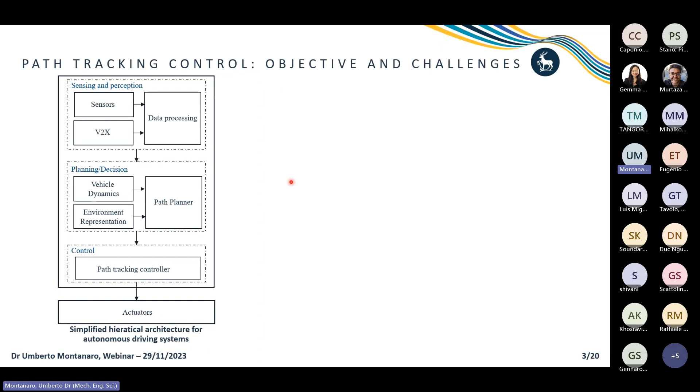If we consider an autonomous vehicle equipped with a hierarchical control architecture, we can clearly identify three key layers: the perception layer that provides the vehicle information of the surrounding environment, the planning layer that is used for generating collision-free trajectories that the vehicle has to follow, and finally the control layer that decides the commands to the actuators in order to perform a given driving task.

In this layer, we find path tracking controllers, which generate commands to follow the path decided by the planning layer, for instance, with a given speed profile.

The design of path tracking control strategies is a challenging task, as the resulting control system must be robust to several factors, such as vehicle nonlinearities and parameter uncertainties, for instance, in terms of cornering stiffness of the tire. Moreover, there is the need of robustness to the coupling of the lateral dynamics of the vehicle with respect to the longitudinal ones.

On top of that, the experimental testing of a path tracking solution can be challenging and time-consuming. In these regards, car-like robots, such as the QCar, can be used to shorten the time of testing and validation of novel control solutions.

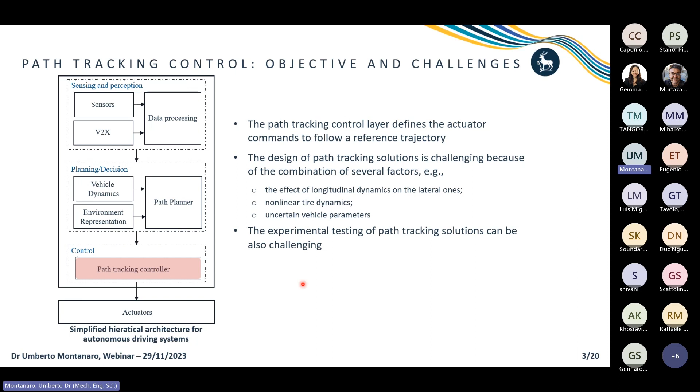In this general framework, the objectives of this webinar are threefold. First, we want to present the design of two path tracking control strategies that have been developed within the S-Cosmos team.

Then the target is to discuss the implementation and the experimental validation of these strategies through the QCars that have been used as a platform for rapid control prototyping.

And the last target is to compare the performance of the proposed solution with a set of algorithms taken from the open literature. Also, these algorithms have been implemented in our lab and used as benchmark control strategies. In terms of hardware, we have three QCars and a Quanser reconfigurable track.

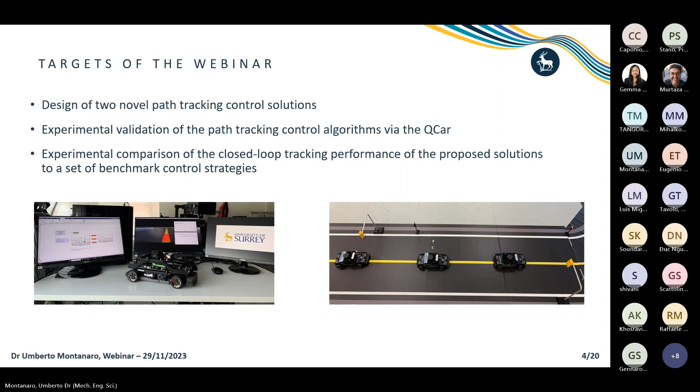This slide briefly presents the points that we are going to discuss in this webinar. As said before, the core part of the webinar is dedicated to the experimental validation of two novel path tracking control solutions that have been designed with two distinct methodologies.

In particular, we will focus first our attention on a neural network-based enhanced model reference adaptive control, here abbreviated as NN-EMRAC. And then we will focus on the design and experimental testing of a deep reinforcement learning algorithm based on an expert demonstrator. For each of these algorithms, we will present first, briefly, their working principle with some design details.

Then we will point out the key features or the unique aspects of each control methodology that we want to test experimentally. And then we will discuss the experimental results through a set of key performance indicators, also abbreviated as KPIs.

However, as the proposed control solutions require, in some way, the use of a dynamic model of the vehicle, before deep diving into each control algorithm, I want to briefly give you some details about the mathematical model of the QCar that we have developed, along with its experimental validation. Moreover, we will touch briefly on the control architecture developed to host these control solutions.

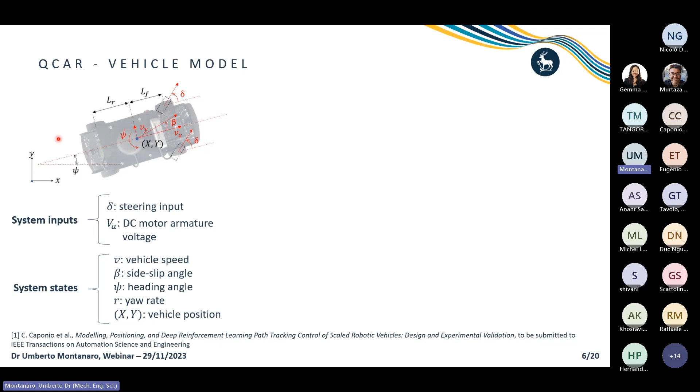The longitudinal dynamics have been modeled through a first-order linear system, while the lateral dynamics are captured by a third-order linear system. For these two models, the lumped parameters P1, P2, and P3, along with the cornering stiffness of the front axle and the rear axle, indicated as CF and CR, have been estimated experimentally using a two-stage identification procedure, as these parameters are those most affected by uncertainty.

The identification procedure and the full experimental validation of the model that we have developed are reported in this paper, titled Modeling, Positioning, and Deep Reinforcement Learning Path Tracking Control of Scaled Robotic Vehicles: Design and Experimental Validation, recently finalized by our group.

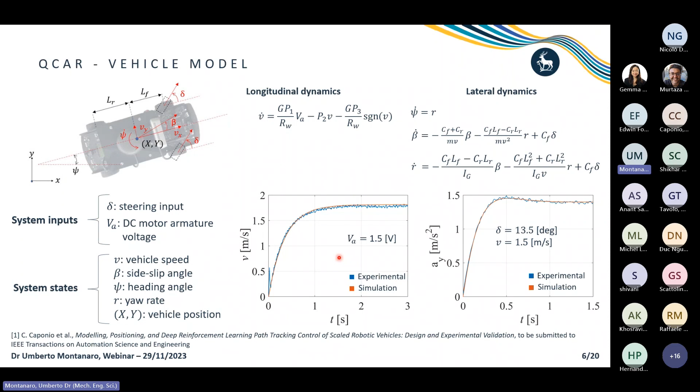Here we just report two model validation results. The first is related to the longitudinal dynamics and shows the evolution of the speed of the vehicle when the armature voltage is a step of 1.5 volt. The second plot is dedicated to validation of the lateral dynamics and considers a step steer of 13.5 degrees when the speed of the vehicle is 1.5 meters per second. For both plots, we note that the state evolution predicted by our models, shown as a red solid line, matches the experimental data represented by a blue solid line.

In terms of control architecture, we can mainly identify three subblocks. The first subblock is a federated Kalman filter composed of two extended Kalman filters and a master filter. This subsystem is used to generate a more precise estimate of the vehicle states based on all the measurements provided by the LiDAR, encoder, and IMU sensors equipping the QCar.

The second subblock, denoted as the tracking error generator, is used to compute the reference trajectory, including the reference heading angle psi ref and the reference curvature kappa ref, as well as the tracking error, including the error on the heading angle denoted as delta psi, and the lateral displacement between the center of mass of the QCar with respect to the trajectory to follow. These errors, computed with this formula, are then sent to the last layer of our architecture, the control layer.

In this layer, we find two controllers: a cruise control for imposing a desired speed, and a path tracking controller, which can be either the neural network enhanced model reference adaptive control strategy or the deep reinforcement learning one.

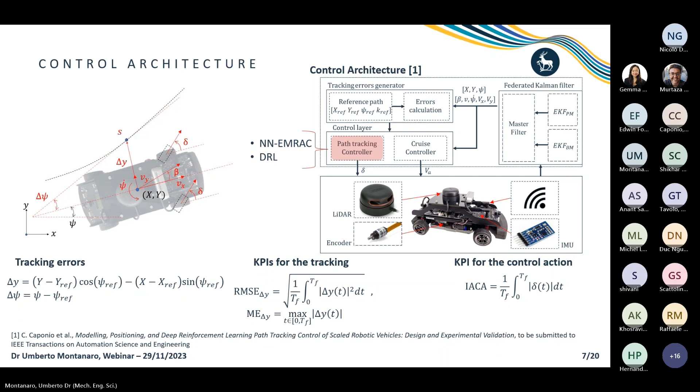So let's start analyzing the design and working principle of our first control solution, the NN EMRAC, the Enhanced Model Reference Adaptive Control equipped with neural network. But first, I would like to show you the neural network enhanced model reference adaptive control structure step by step.

So if we think of classical control strategies in the state space domain, usually these control strategies are composed of two control terms: a feedback control term and a feed-forward control term, where the feedback gains Kx and Kr are usually constant and selected offline by practitioners.

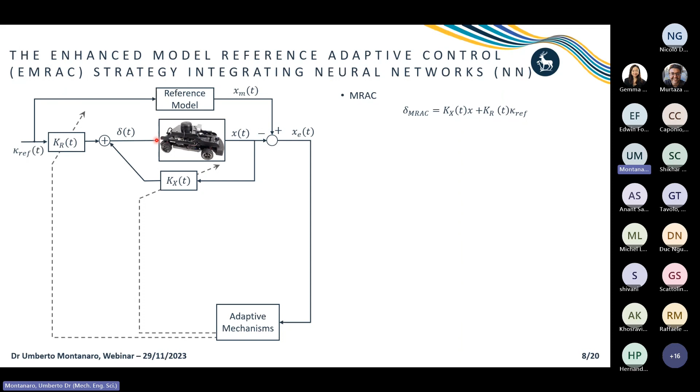In the case of the standard model reference adaptive control algorithms, these feedback gain and feed-forward gain are adjusted, or better adapted, online through an adaptive mechanism such that the dynamics of a reference model are imposed on the plant, in this case the QCar, despite parameter uncertainties, external disturbances, and eventually nonlinear terms not considered during the modeling of the plant.

The enhanced model reference adaptive control strategy extends or augments the classical model reference adaptive control solution by adding two additional control terms: an adaptive integral action and an adaptive switching or sliding mode control action. The gain for the integral action Ki and the gain of the switching action Kn are again made adaptive through an adaptive control law.

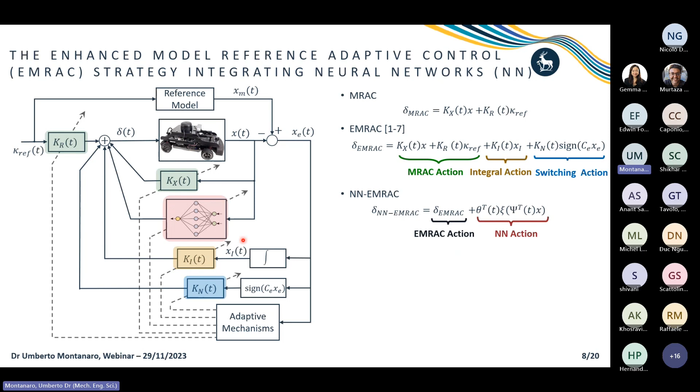Finally, the neural network Enhanced Model Reference Adaptive Control further extends the control action by equipping the classical Enhanced Model Reference Adaptive Control strategy with the control action provided by a neural network, to further improve the tracking of the reference model.

As an additional note, I want to point out that the initial version of the Enhanced Model Reference Adaptive Control solution was proposed around 2010 during my first PhD. However, over the years, I had the chance to extend the theory of the Enhanced Model Reference Adaptive Control in different directions, and I also had the possibility to apply this theory to several engineering control problems, including the control of the electronic throttle body, common rail systems, and robotic manipulators. A version of the algorithm was also used for path tracking, but not experimentally validated.

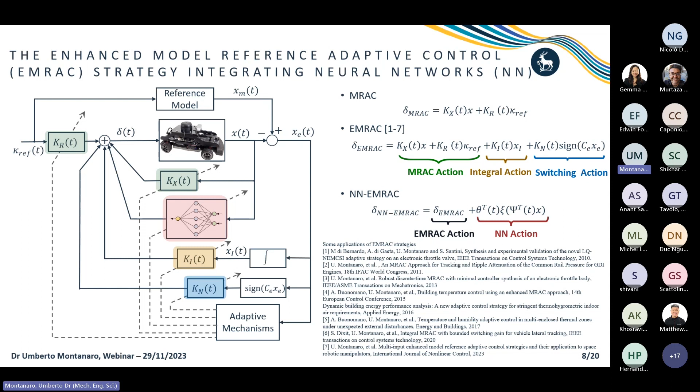In this webinar, we experimentally test via the QCar different Enhanced Model Reference Adaptive Control formulations, including also neural network.

In terms of details on the control design, the reference model has been selected as the nominal model of the QCar presented previously in this webinar, controlled through an optimal linear quadratic control action, abbreviated as LQ. The states used for control are the lateral speed, the yaw rate, the lateral error, and the heading error. For the neural network activation function, we have selected the ReLU.

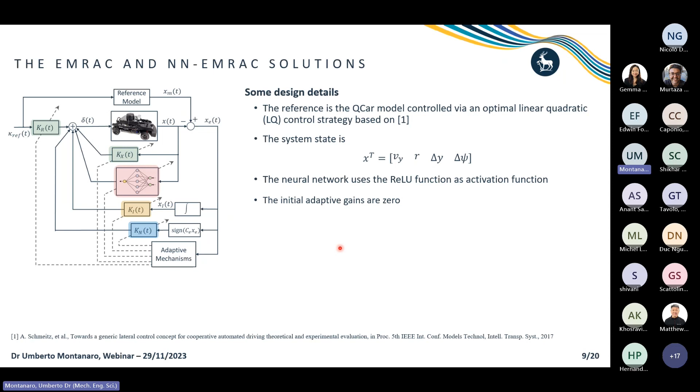Finally, it is important to point out that all the initial adaptive gains and the weights of the neural network are set to zero. Thus, in our design, we assume that we don't have any pre-knowledge of the plant that could have been used for initializing these gains. And somehow here we are considering one of the worst case scenarios, where the gains are all initialized at zero.

The target of the experimental campaign is threefold. We want to first study the closed-loop dynamics with and without the neural network, and this also enables the second target: the evaluation of the effect of the neural network control action on the closed-loop tracking performance. Another target for the experimental analysis is the study of the dynamics of the adaptive gains.

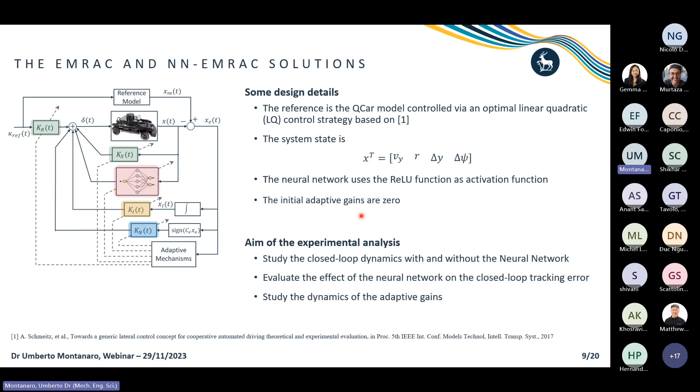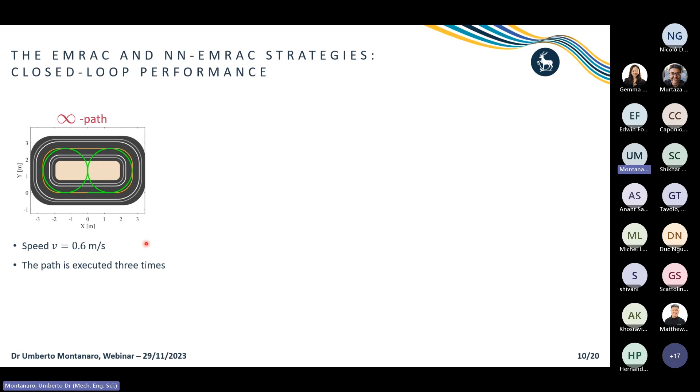In terms of path, we have selected this infinity shape path to be performed with a constant speed of 0.6 meters per second, and this path is executed 3 times.

Here we have some experimental data where the dashed black line is the reference model dynamics. Then we have the closed loop dynamics given by the Enhanced Model Reference Adaptive Control in green, while in orange we have the output provided when the neural network Enhanced Model Reference Adaptive Control is used.

From these initial experimental data, we can already derive some interesting observations. First of all, we can note that the contribution of the neural network can improve the tracking of the reference model in steady state. For instance, if we look at the steady state heading angle, we can see there is an improvement compared to the reference model. But mainly, we can note that the neural network improves the tracking performance during the initial transient of the adaptive gains.

This is clear if, for instance, we look at the initial transient of the lateral error and the initial transient of the heading error.

In terms of adaptive gains, here we have reported the evolution of phi and phi N for both the adaptive algorithm with and without the neural network, where phi is the integral part of the stack vector composed by the gains kx, ki, and kr, that are the gains of the continuous part of our adaptive strategy. Instead, phi N is the adaptive gain of the adaptive switching control action.

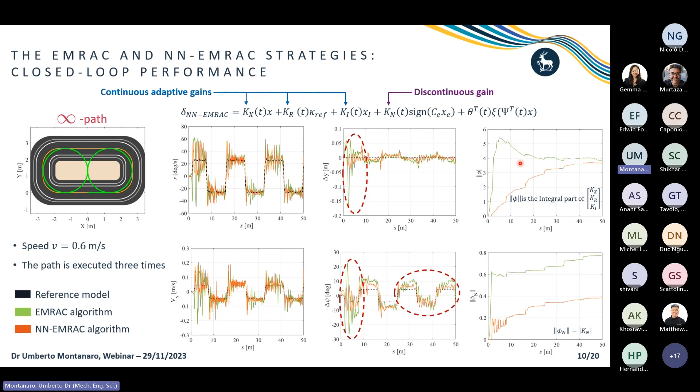The qualitative analysis that we have just presented is further confirmed by the study of the key performance indicators, which have been computed over the first cycle for 3 different speeds: 0.6, 0.7, and 0.8 meter per second.

The analysis of the KPIs shows that for 0.6 and 0.7 meter per second, the control effort required by the neural network enhanced model reference adaptive control is smaller than that required when the contribution of the neural network is switched off, and this improvement is about 30%.

This reduction in the control effort is mainly because there are smaller errors during the initial transient. If we look at the key performance indicator for tracking performance, we see that it improves with the use of the neural network, especially for 0.6 and 0.7 meter per second. For 0.6 meter per second, there is a reduction of the maximum error during the initial transient of about 75%, while the reduction of the root mean square error is about 71% when the neural network contribution is switched on.

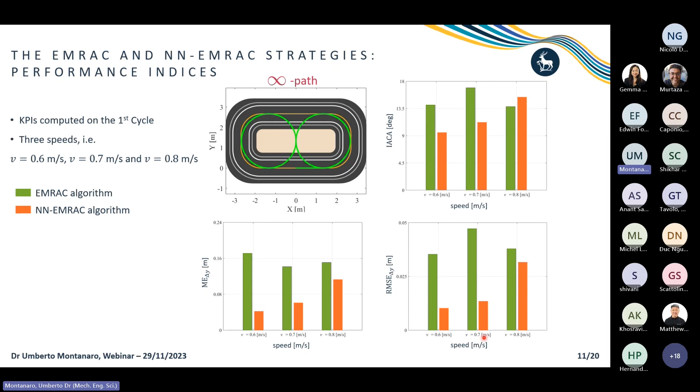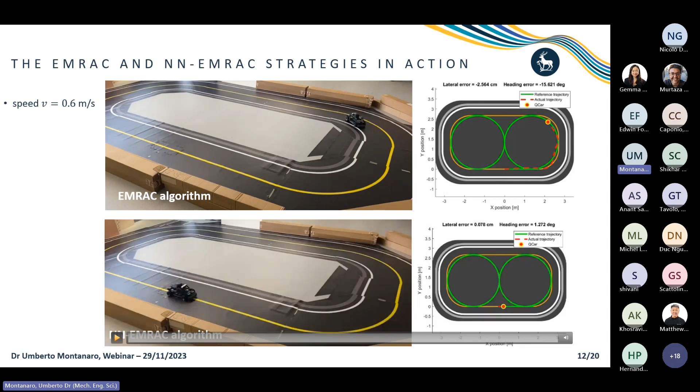Instead, when the QCar is controlled through the neural network enhanced model reference adaptive control, we can see that the initial errors between the reference trajectory and the actual trajectory reduce quite significantly. The improved initial transient response is due to the neural network control, which over the initial transient provides a further adjusting control term to the overall control action.

After the first transient, the adaptive gains and the weights of the neural network continue to update to provide closed-loop robustness to unmodeled dynamics, disturbances, and vehicle parameter mismatches.

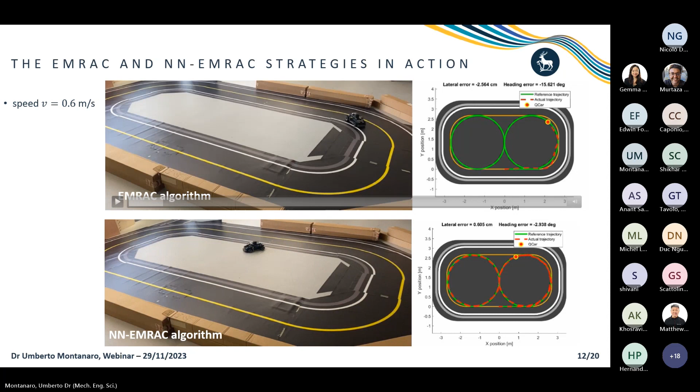Now we can focus on the second control solution for this webinar, which is a deep reinforcement learning strategy equipped with an expert demonstrator. Again, to be all on the same page, let's briefly revise the working principle of a deep reinforcement learning based control algorithm by considering directly the learning architecture that has been developed for the QCar.

For the proposed solution, the controller or agent, as it is called in the framework of deep reinforcement learning based control methods, is a neural network which decides the action or control action based on a set of measurable quantities known in the literature as observations. The agent decides the action based on observations in order to complete a given task.

In the case of path tracking, the task to complete is execution of the path with the smallest tracking error. In terms of action, we have selected the rate of variation of the steering angle, or in other words, the derivative of the steering angle, while the adopted observations are the lateral error and its derivative, and the heading error and its derivative.

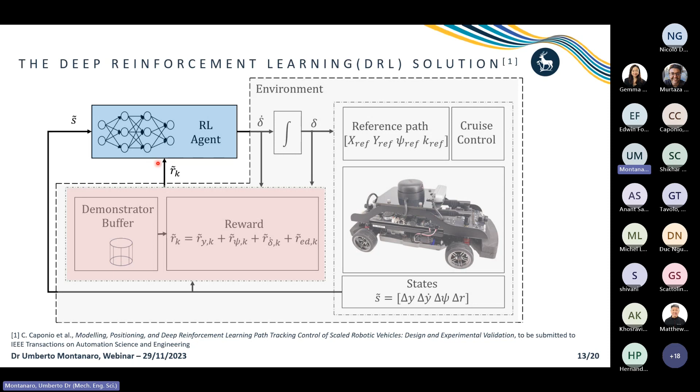In this framework, the neural network is trained to maximize the cumulative reward of a sequence of episodes. From the description of the working principle of a deep reinforcement learning control approach, it emerges that the selection of the reward function is critical for the execution of the task.

In our work, we have used an approach based on the use of an expert demonstrator to formulate the reward function. Specifically, our reward function is composed of four terms.

The first term, here indicated as Ry, considers the lateral errors and mathematically is expressed through this piecewise function that takes this shape. So if the lateral error exceeds a threshold of 0.5 meters, then there is a very negative reward. While if the lateral error is between two thresholds, then the reward is positive and increases as the error is decreasing.

Finally, the reward given by this first component is positive and constant if the error becomes smaller than a second threshold. The reason for saturating the reward when the error is small is to reduce the convergence time of the cumulative reward by avoiding the exploration of actions that lead to very small lateral errors in simulation, but that cannot be obtained in practice because of sensor limitations.

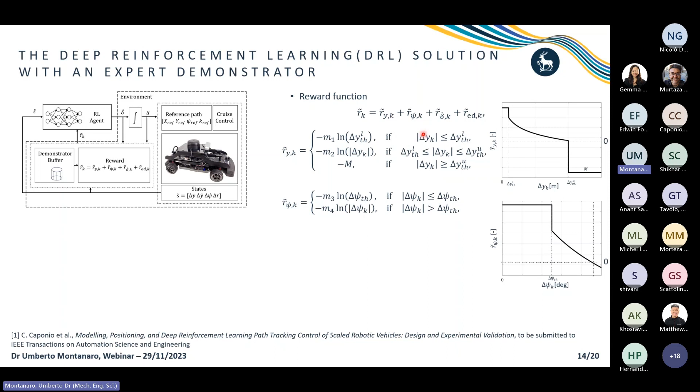The second component of our reward function is somehow similar to the first one, but here we consider the heading error. Instead, the third component of the reward function is a penalty based on the control action, which, as I said before, is the derivative of the steering angle.

This penalty is used to help the training find control strategies or policies that promote smooth variation of the steering angle. In other words, this penalty helps to avoid chattering phenomena or high-frequency components on the steering angle.

The fourth component is a term based on an expert demonstrator. In our framework, the expert demonstrator is the control action provided by an optimal linear quadratic regulator, LQ, that has been tuned using the nominal model of the QCar and can obtain in simulation a very precise tracking of the path used for training.

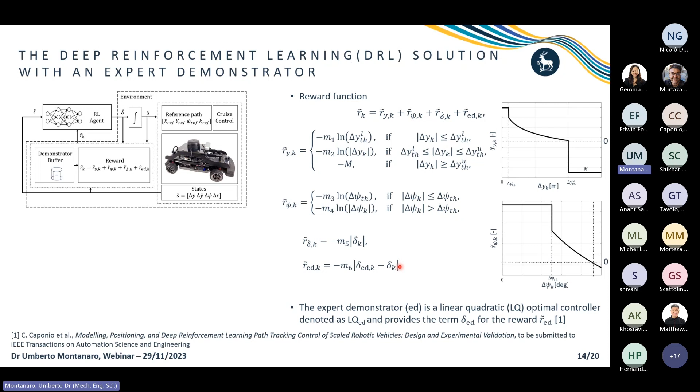The fourth component of our reward function is a penalty based on the mismatch between the steering angle requested by the agent and the steering angle requested by the expert demonstrator.

In terms of some details, for emulating the environment and for the control design of the expert demonstrator action, we have used the experimentally validated QCar model. Furthermore, the path that we have used during training is this S-shape path, and here you can see the cumulative reward over the episode. This picture also shows that the training is quite fast and converges in about 300 episodes.

In terms of experimental campaign, the target is again threefold. First, we want to test that the agent trained in simulation can actually impose a trajectory not considered during the training phase. This is an important point, as there is always a mismatch between the simulation environment and the experimental environment that can generate what is known in the literature as a simulation to reality gap.

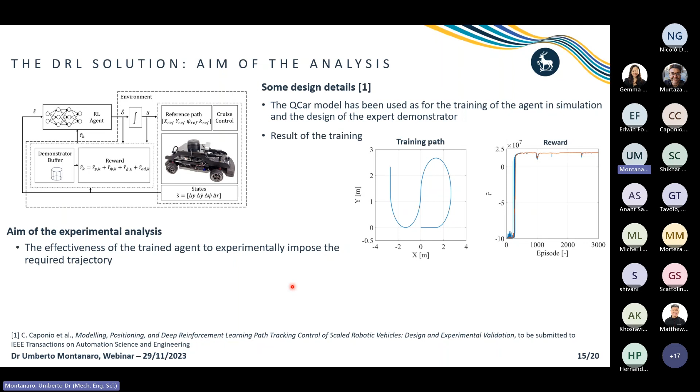This gap can prevent the trained agent from performing well in reality. Then we want to test the importance of the expert demonstrator to generate an agent that can experimentally impose the desired path. In other words, we want to test the robustness of the trained agent to paths different from those considered during the training phase.

Finally, we want to study the closed-loop performance and compare the closed-loop performance obtained with the deep reinforcement learning strategy with respect to a set of standard control approaches. In particular, we want to compare the performance of the deep reinforcement learning algorithm with respect to those experimentally provided by the expert demonstrator. We want to show that the learning process can improve the performance of the control strategy used for supporting the training.

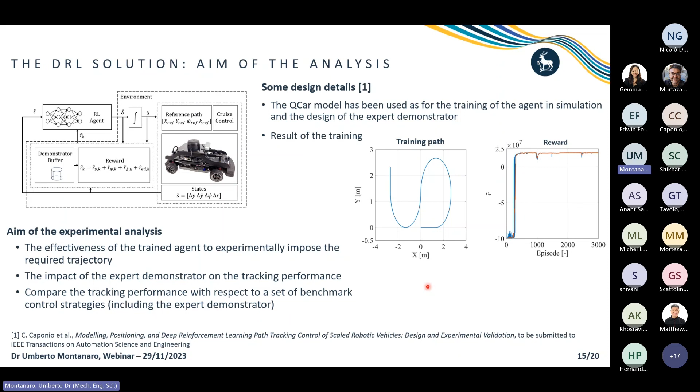For the deep reinforcement learning algorithm, to test the generalization of the approach, we have selected three different paths: an O-shaped path, an infinity-shaped path, and a path composed by two sub-maneuvers. First, a U-turn followed by a collision avoidance maneuver. This collision avoidance maneuver is inspired by the standard ISO 3888, used for real vehicles, but scaled by a factor of 10 to consider the actual size of the QCar.

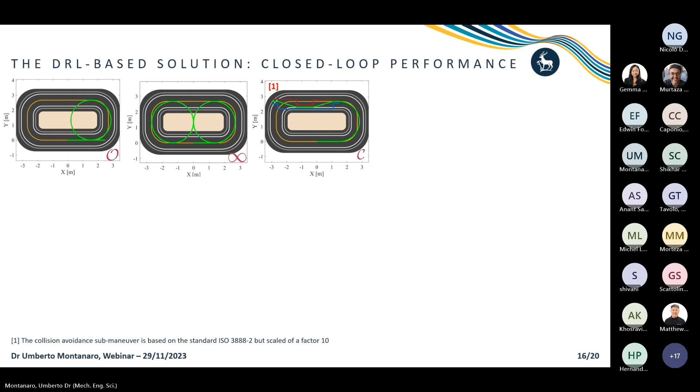In addition to the deep reinforcement learning algorithm, we have tested three standard control solutions. Specifically, a classical control strategy composed of feed-forward and feedback algorithms, and two linear quadratic regulator controllers. The first one, indicated as the LQ-ED strategy, is practically the strategy that has been used as the expert demonstrator for the training.

Then we have used a second LQ strategy, here indicated as LQ-CM, which is a linear quadratic regulator strategy equipped with a feed-forward control action, in order to have, in principle, for the nominal model of the QCar, zero steady-state error for constant cornering.

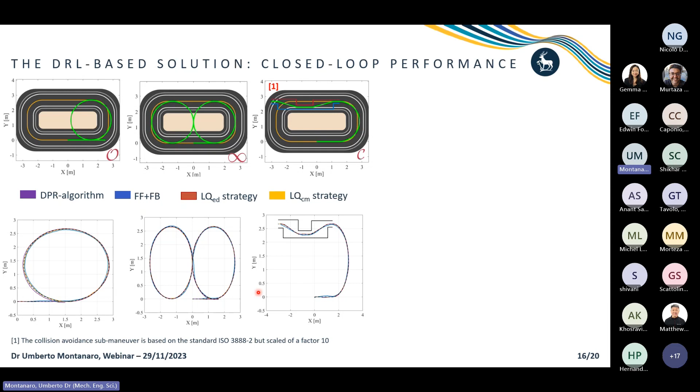The path obtained by the application of each controller is reported here, and these are already experimental data. This picture shows that all the solutions are capable of keeping the QCar close to the required path. However, from a deeper analysis, we can unfold the difference in tracking performance among the solutions.

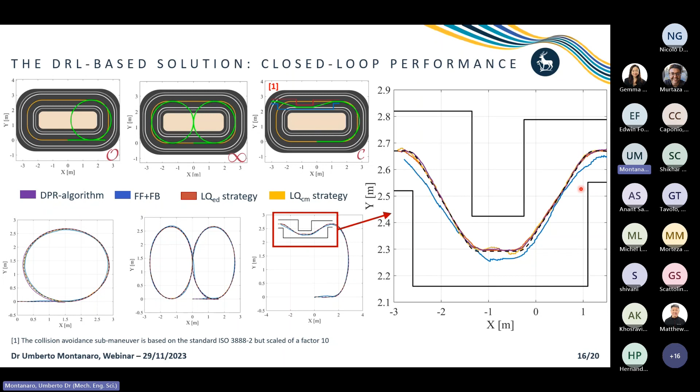The first analysis comes with a zoom-in of the tracking performance during the collision avoidance submaneuver. Here it is shown that the tracking performance provided by the feed-forward feedback controller is not good, and is less precise compared to the remaining controllers. If we considered the actual width of the QCar, there would have also been a collision of the car with this corner.

This reduction is more significant if we compare the control effort of the deep reinforcement learning strategy with respect to the LQ used for training. This is definitely a first improvement induced by the learning process. Only the feed-forward feedback controller provides a smaller control effort compared to the deep reinforcement learning algorithm.

However, if we consider the KPI for the tracking performance provided by the feed-forward feedback strategy, those KPIs are much worse compared to those obtained with the deep reinforcement learning algorithm. Furthermore, except for the root mean square error computed on the O-shape maneuver, the deep reinforcement learning provides better tracking performance also compared to those achievable via the LQ strategy, thus confirming that the learning process underlying the design of the deep reinforcement learning algorithm can improve the performance of the expert demonstrator.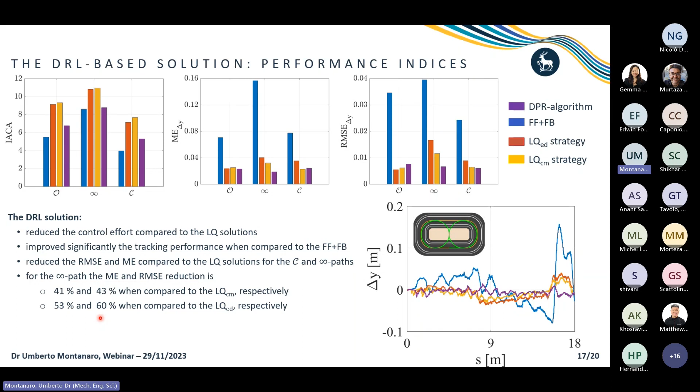Now, this is the final analysis that we want to present in this webinar. As we have previously discussed, a key component of our reward function is the term weighting the mismatch between the expert demonstrator action and the action decided by the agent.

In order to evaluate the impact of this contribution on the learning process and subsequently on the closed loop tracking performance, we have trained another agent where these contributions have been removed. What we have noted is that in simulation, the cumulative reward converges, and the agent, also without this contribution, performs well in simulation. However, when we experimentally tested the agent trained without the information of the expert demonstrator, the closed-loop tracking performance was quite poor.

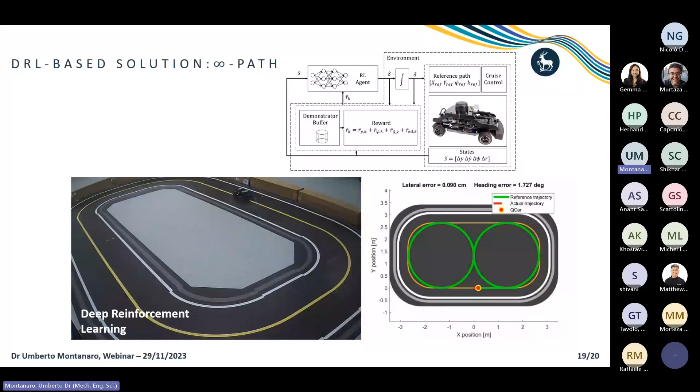May I share my screen? Yeah, please go ahead. I have some backup slides that might be used to support this point. Can you see my screen? Yes, we can. So here we have the design of the two LQ strategies that have been used for comparing the deep reinforcement learning algorithm with the classical controllers.

Here, practically, there is the model of the QCar that we have previously introduced, and for both control strategies, the control action is composed of a feedback term and a feed-forward term. So the key difference between the LQ-ED, the LQ algorithm used for training, and the LQ-CM algorithm with the feed-forward compensator, is how we compute this feed-forward action.

In the case of the algorithm used for the expert demonstrator, the feed-forward action is computed based on the reference curvature, where L is the length of the QCar. Instead, for the LQ algorithm with perfect compensation of the tracking error in steady state, this feed-forward term is computed through a formula that in principle should guarantee zero tracking error for the lateral mismatch when reference curvature is constant. So this is basically the key difference between these two algorithms.

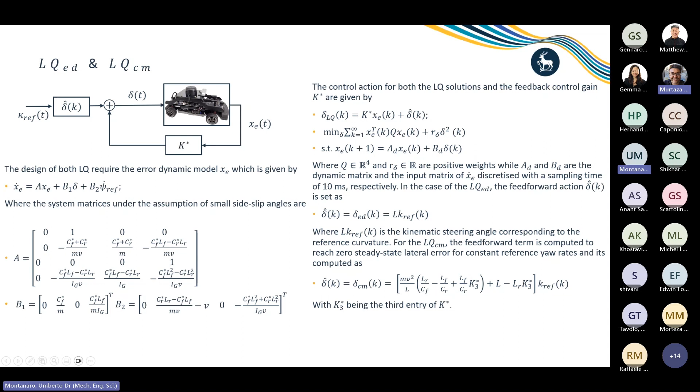Thank you, we have a second question. I think you can just continue sharing your slides in case you have more information. The second question is: could you provide more details on the identification procedure used to determine the cornering stiffness?

Good. Practically, for the cornering stiffness, we have used a two-stage identification strategy. First, we try to identify what is known as the understeering gradient, which is the linear coefficient between the steady state lateral acceleration with respect to the steering input during a constant cornering. The understeering gradient depends on both the front cornering stiffness and the rear cornering stiffness, so this coefficient embeds both.

So in order to discern the front cornering stiffness from the rear one, we have a second stage of our identification procedure, where we try to find, through a sequence of step inputs, the rear cornering stiffness that best fits the transient data, under the condition that the understeering gradient is kept constant and equal to the one identified during the first stage.

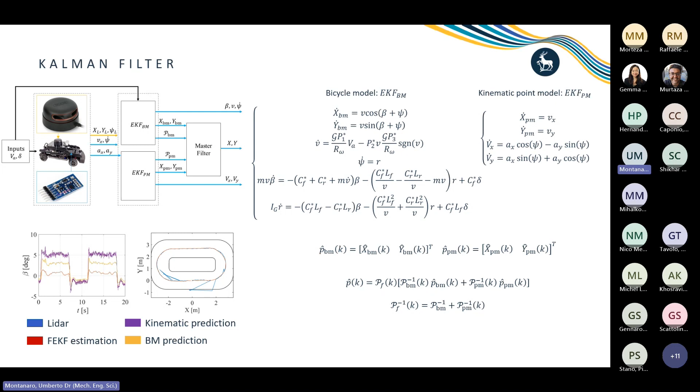One question is, what is the hardware used to run the path tracking controller, Kalman filter, etc.? In terms of hardware, all of these are deployed on the QCar. This is running on the QCar, using the Jetson TX2 NVIDIA board as well.

The next question is, what is the sampling time used for the path tracking controller? It was 10 milliseconds.

The next one is a question based on slide 17 in your presentation. The FFFB can perform better than the deep reinforcement learning if the vehicle model is improved. Does this require real-time model tuning? Sorry, can you tell me again the question? It says the FFFB can perform better than the DRL if the vehicle model is improved, which is real-time model tuning.

Well, what you have noted is that the parameters of the model also depend on external conditions. Especially for the longitudinal dynamics, we can have different results based also on the surrounding temperature. So improving the model is definitely a possible approach, and estimating the parameters of the model is something that will make the controller more robust. But if the controller strongly relies on these estimates, it might fail when there is a huge mismatch between the actual vehicle parameters and the ones used for the controller design.